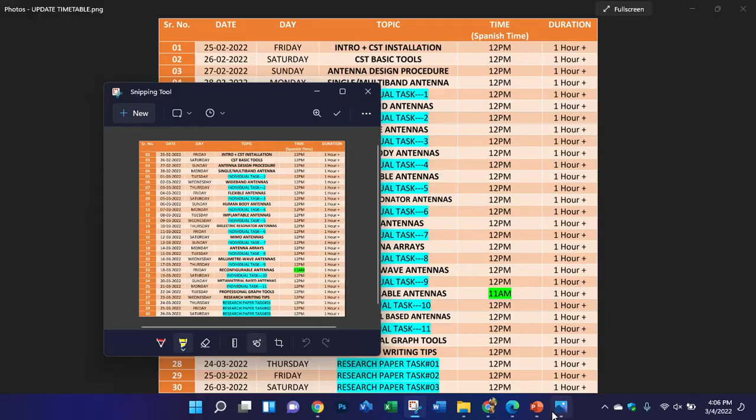Hello, sir. I saw your paper has been published. Congratulations. Yes, thank you. Congratulations, sir. This is not the only one. There are 3 other journal papers accepted, and I hope they will be published very soon.

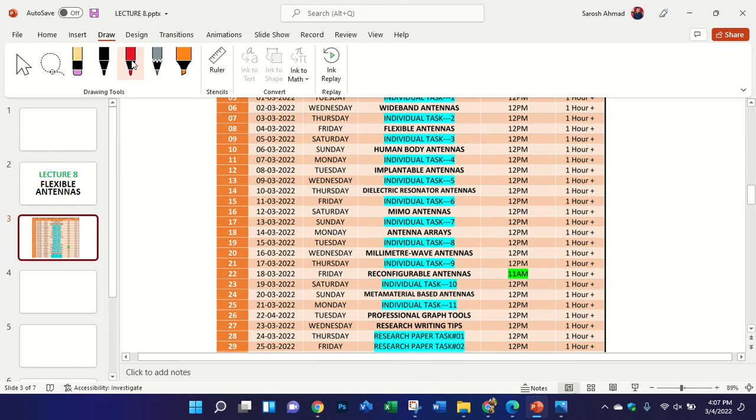Okay, let's come to the main point. I have realized that very few people did the task I gave you, and that's why I want to change my schedule, so that we will have more time for writing. So for this slide I want to change my schedule like this. Wait a minute. So this was the schedule, and we have finished our first, second, third, fourth, fifth, sixth, seventh lectures. We have completed our 7 days.

What we have next: today we will discuss flexible antennas. And for the others I want to change the schedule like this. I want to remove this one, the individual task. All individual tasks will be at the end of the lectures. I want to first target only antennas. Yes, that's a great idea. Yes, I will update the schedule and I will send it to you in the group.

I am thinking that because I have given the task and very few people did it, what if I continuously give the lectures, like on the next day I will give a lecture on human body antennas, then implantable, then dielectric, and once we complete all the types of antennas, you will have enough knowledge to decide which design you want to work on. Once you have decided, we will make groups, like 2 people who want to work on the same topic, and all of you have to publish one conference paper and one journal paper.

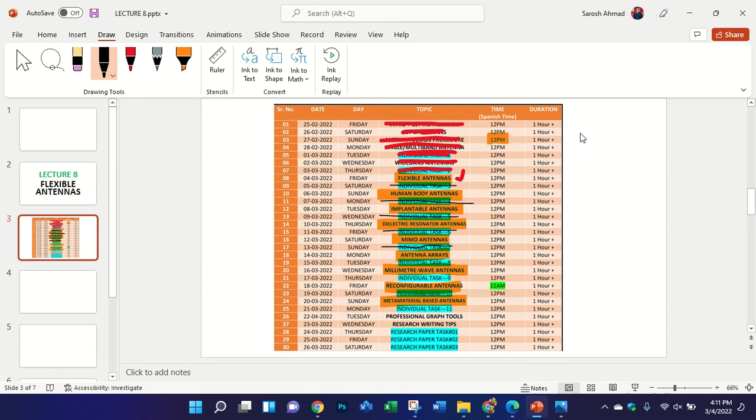Okay, thank you. Excuse me, Ahmad. The current one, 12 p.m., I think will be okay, because we have a lot of appointments on Saturday and Sunday, and we scheduled for 1 month. If we change it again, it will be a little bit difficult, because we also told our supervisor that I have a course to complete for the whole month, so he gives us the slots. Okay, only Friday at 4 p.m. is okay for all of you. 4 p.m. Yes. And for the other days the same timing, 12 p.m.

Okay. So what we have decided, I will continuously give the lectures. Sorry, Mr. Ahmad, can you please focus on the research paper? Yes, that's why I am telling you that I continuously complete the designs so that we will have enough knowledge and we can mix the fields, I mean mix the types of the antenna. For example, if we have 12 to 15 days for writing a research paper, for the first 2 to 3 days we will decide the design, or we will prepare the design to get some novel aspects. Then in the next 10 days we can continuously work on writing the research paper.

Yes, because we need more knowledge and tips about research papers. Yes, that's why I've decided, because I individually checked that very few people are working, so once I complete these important topics, then we will focus on research writing, and I will surely guide you and help you in that regard. Yes, thanks a lot. It will be like a collaboration with each other, something like that.

You all will work under my supervision in that case. Suppose two people like to work on implantable antennas, then I will create a group with you and the other person, and with me. And suppose some people like to work on dielectric resonator antennas; only two people are allowed to work on the same topic. So you have to decide the topic once we have completed these topics, and then we will decide the research topics, which design you want to work on, and how you want to start.

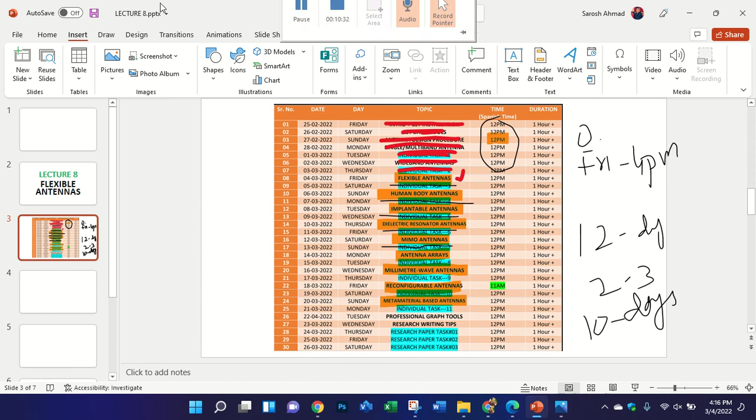Okay, so let's start with flexible antennas, and I remove this one. Today's lecture is about flexible antennas, in which we will study how we can analyze the flexibility of the antenna. Flexible antennas can be interlinked with other types of antennas, like human body antennas; they are mostly used in human body antennas, like implantable flexible antennas. So we can mix flexible antennas with human body antennas, and we can also mix flexible antennas with implantable antennas.

Because in flexible antennas we also have many different types, like wearable antennas and textile antennas, because cloth is a flexible material, and when we wear cloth, and when we sit down, stand up, and bend our hand, our cloth bends a lot.

So that's why flexible antennas have a major and very important role. We can mix this flexible antenna with many other types of antenna, and in this way we will have good designs. First we will study a review on flexible antennas, which types of flexible antennas are available in the research, and I will show you one of my designs.

Also we can focus on circularly polarized implantable or circularly polarized flexible antennas. This is the flexible circularly polarized antenna. Circular polarization is very important in terms of the novel aspect. If we achieve circular polarization in flexible or in all types of antenna, like wideband or on human body dielectric, in each case it is one of the novelties. So it is a very important thing.

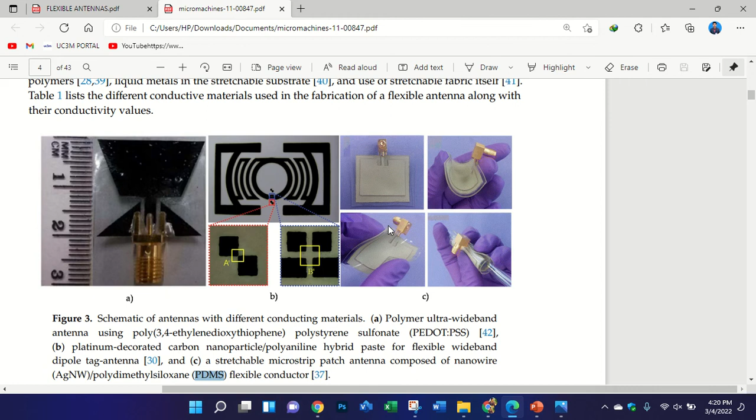You can see here this is actually an invisible substrate, and the name of this substrate is polystyrene. But I think this material is not available in my lab, or we can order it, but I suggest you use a polymer substrate or PDMS substrate. I think in CST, if you write PDMS, you will find the material. This is a flexible material that can be bent along the x-axis or y-axis. We will also study how to bend the antenna and do the bending analysis. So there are many types of material.

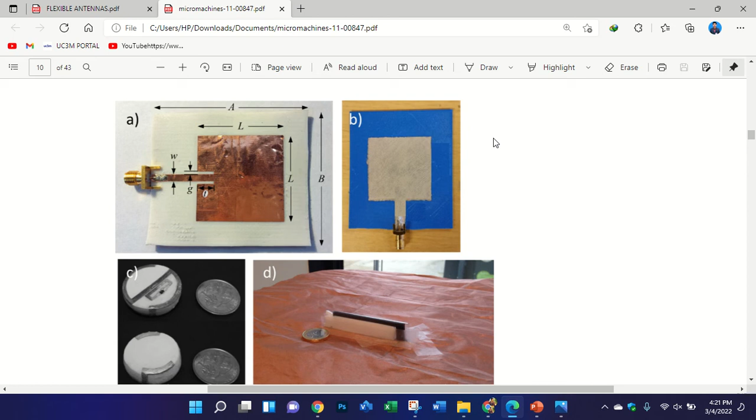You can see this is an invisible substrate, like a transparent paper or transparent sheet. Also some flexible antennas are made of textile material or cloth. I will show you here. You can see this is made of cloth. It can be cotton material or jeans material. I made one design on a jeans material, so you can use jeans material. Whenever you decide on a material, you need to know its properties, like relative permittivity, loss tangent and available thickness.

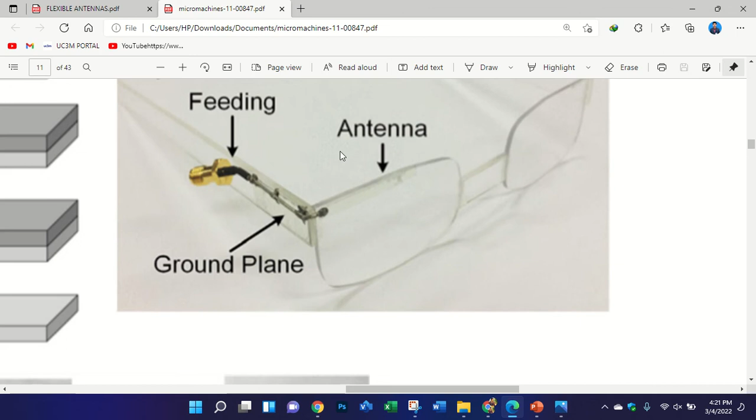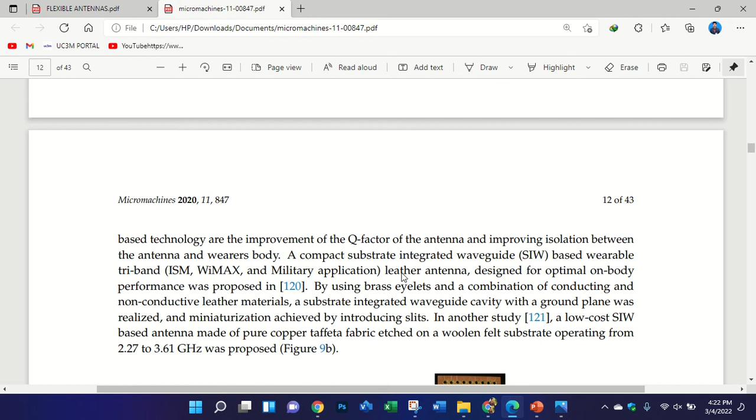Also in some glasses we use antennas; these are transparent antennas, very small antennas, embedded with some sensors. There are a lot of applications of flexible antennas, but we will not go to very complex ones. We will focus only on applications that are easily fabricatable here, so we will not have any problem. You can see this is, I think, a jeans material. Let's check the material here. I think they did not mention the substrate material.

Yes, you can see here this is another cloth material, textile. For textile antennas, one of my friends, from Algeria or Egypt I think, has a fabrication facility for textile materials. So I can ask him to provide us the data sheets he has in his lab for materials like jeans, and we can also work on invisible antennas, and they are flexible materials.

And some people like to make flexible antennas with metamaterial, okay. One of my papers is on metamaterial-based flexible antennas. And in Rogers, if you are using a very low thickness substrate, like less than 1 millimeter thickness, like 0.76 millimeter or 0.25 millimeter substrate material, then it is flexible in real time. But in a prototype, if you are using 1.6 mm or 3.2 mm, they are not flexible. In simulation yes, but experimentally they are not flexible.

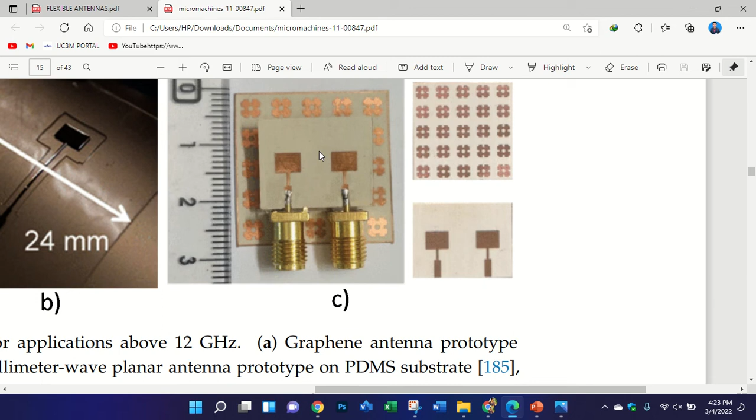I will provide you the data sheet of the flexible materials that we have in our lab, and then you can work on it. But first I suggest you use Rogers material that has very low thickness, okay.

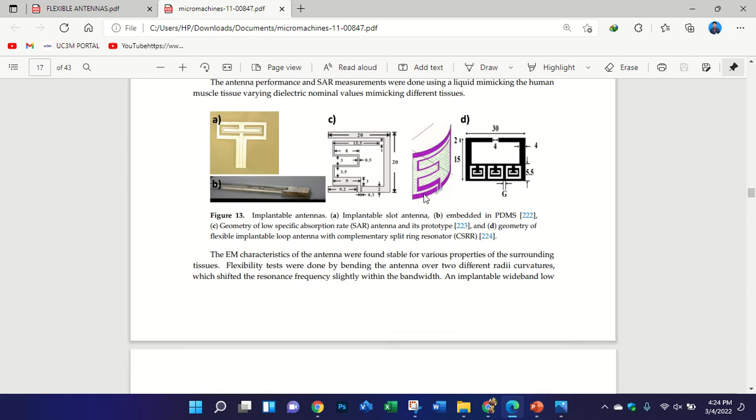And some people use flexible antennas in implantable antennas, like you are using a flexible material of polyimide, and you can bend the flexible antenna on a capsule. In this way it will become a capsule endoscopy implantable flexible antenna. Like you can see here, this is a flex antenna made of flexible material. They did not mention the name of the material, but I think it can be Rogers Ultralam or a polyimide substrate. And they have bent the antenna on a capsule.

And then they have inserted the antenna in a phantom. It can be a skin-mimicking gel, or it can be another material that has the property of muscle. Okay.

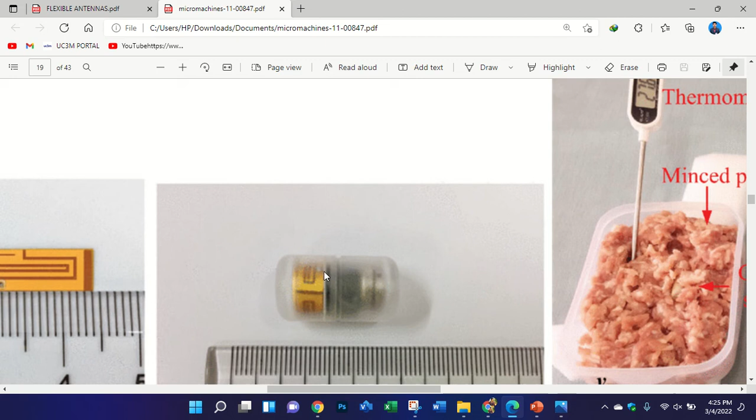And also you can see here, I forgot the name, they have a battery. In a capsule, they have inserted an antenna. They have rolled the antenna and connected this antenna with the battery, and this is a capsule. And then they have embedded it inside minced pork that has the same properties as muscle tissue, with a relative permittivity near 58, or 54.

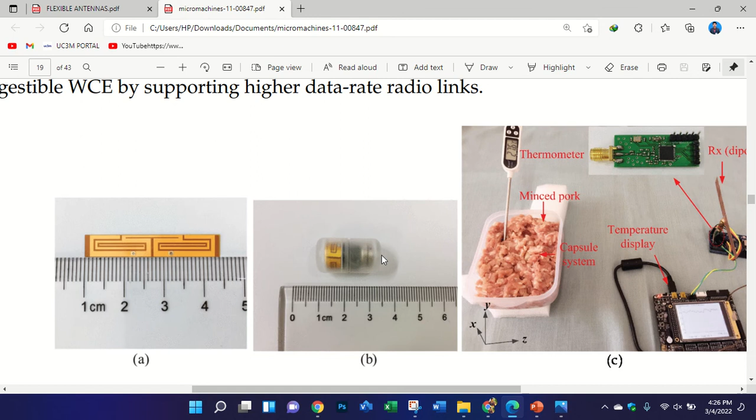Excuse me, Mr. Sarosh, it's endocapsule, I think. Yes, endocapsule, this is an endoscopy. Yes, endoscopic or capsule antenna. In implantable they are very much the same. You just need to bend your antenna on a capsule, and then you can test in minced pork or skin-mimicking gel.

Why is it important to have flexible antennas? What are the characteristics of these flexible antennas? Suppose you have designed an antenna. Suppose you have S11 on the y-axis and frequency on the x-axis. Then suppose you have designed it to operate at 2.45 gigahertz, and your design is operating at 2.45 gigahertz.

At minus 10 dB. In a flexible antenna you need to achieve some more bandwidth, because if you bend the antenna, suppose along the x-axis, your S11 may shift. So if you have a wide bandwidth, and you have bent the antenna along the x-axis, it will behave like this, and it should still cover the ISM band, like 2.45. When you bend the antenna, there is a little shift in the frequency.

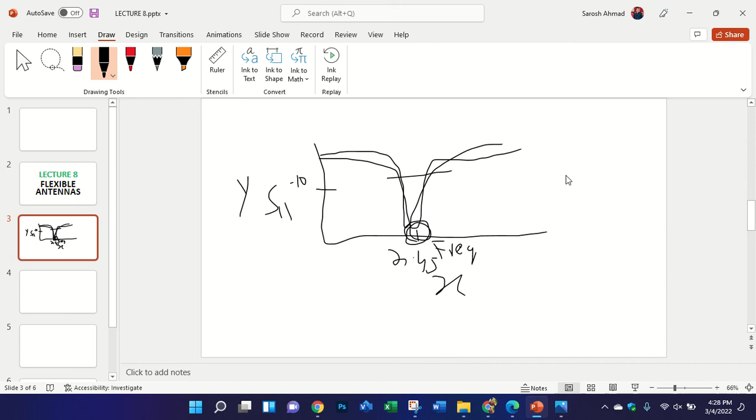If there is no change in the frequency band, then you can say your antenna is a flexible antenna. And if after bending your antenna you are not able to achieve the same frequency band, then you cannot claim that your antenna is a flexible antenna. So you check the antenna along both axes, the x-axis and the y-axis, to check whether the antenna is bendable or not.

Like this one, this is another journal paper of mine. This is a Q1 journal of Tech Science Press, with an impact factor of 3.772. We will discuss the flexible circularly polarized antenna; we are not discussing the implantable antenna. This paper is 70% on flexible antennas, so we will discuss this antenna in detail.

You can see here this is a very simple antenna made of a Rogers 5880 substrate that has a thickness of 0.25 millimeter. I also suggest you use this material to make your antenna flexible, because Rogers 5880 is a compatible substrate, and it is also a bendable substrate. It will not disturb your frequency if you bend your antenna along the x-axis or y-axis.

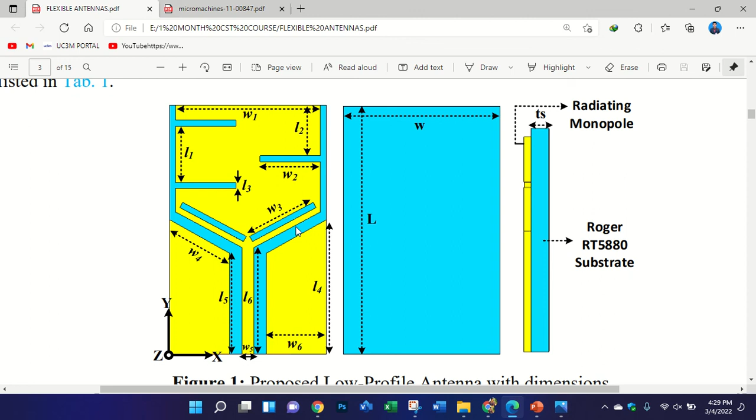So you can see this is a radiator that has some slots inside, and this is a feed line, and this is a modified ground plane. This is a CPW ground plane. You can see I have modified some shape, and also this one, to achieve the circular polarization.

The size of the antenna is very small. In implantable antennas, now people are working on implantable antennas. The implantable antenna has a size of 7 x 7 millimeter square at the frequency of 900 megahertz. And also I have some published papers on implantable antennas that have a size of 5 x 5 millimeter square at the frequency of 900 megahertz.

So this design has a length of 21 millimeter and a width of 13 millimeter, and it is operating at 2.45 gigahertz. So these are the design steps of this antenna. First I designed a simple patch antenna, then modified the patch radiator, then modified the CPW, and then created a slot to achieve the wide bandwidth.

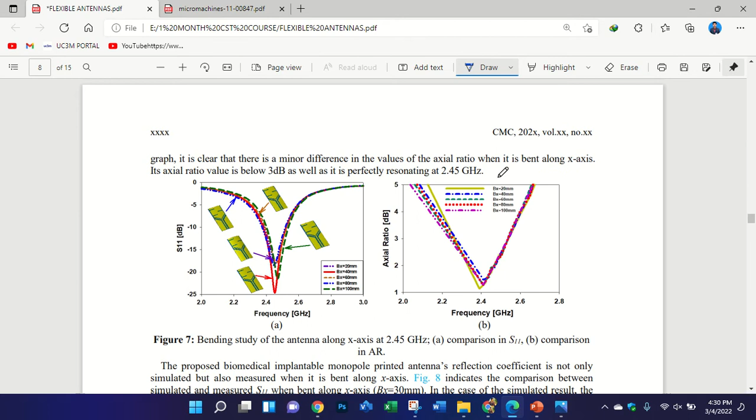So let's discuss its flexibility. In the simulation you can see, first I bend the antenna along the x-axis, and even if I bend the antenna at 20 millimeter radius, and I simulated it from 20 millimeter to 100 millimeter radius, you can see the band still remains the same at 2.45 gigahertz. So it is a flexible antenna.

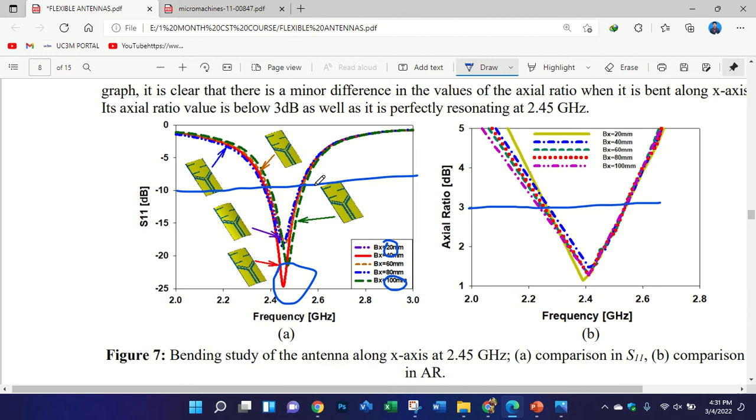You can see along the x-axis it has the same results as when it is not bent, and also you can see the change in the axial ratio. There is not much difference in the axial ratio. This is along the x-axis, and then I have tested this antenna in the lab. You can use a foam material.

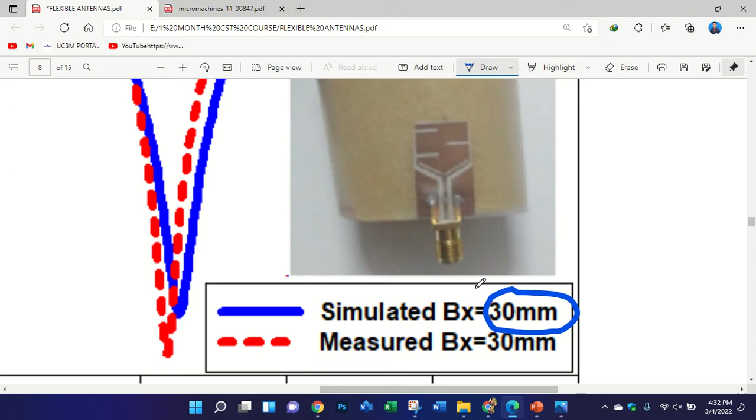There is a white foam, you may know, that has properties like free space, and you bend your antenna along the x-axis. You can bend this antenna on a foam and then attach it with a sticker or tape, and then you can see here it is bent along the x-axis, and the radius of this foam is 30 millimeter. That's why I was able to test the antenna only at 30 millimeter.

Then I simulated the antenna along the y-axis. You can see here, first I simulated at 20 millimeter and then up to 100 millimeter, and you can see the S11 still remains the same, just with some little reduction in the return loss, but it is still below minus 10 dB at the operating band of 2.45 gigahertz, and there is no big change in the axial ratio.

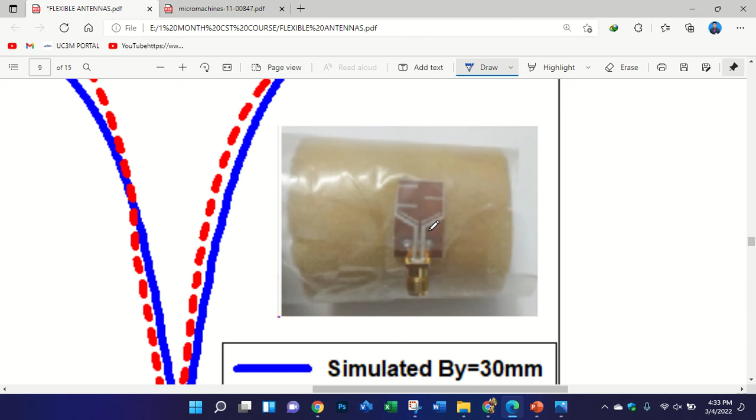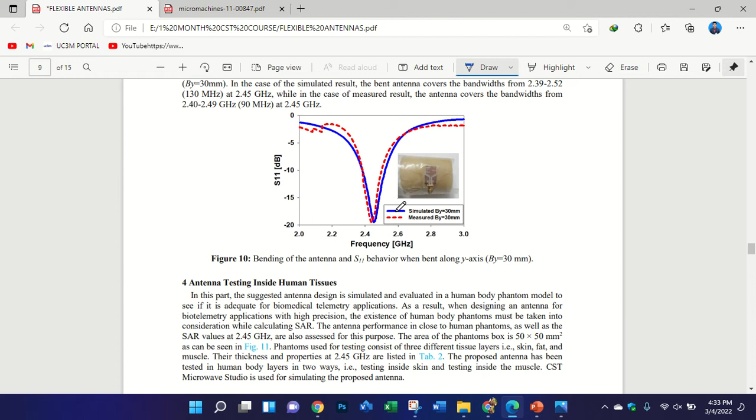And also I tested along the y-axis. You can create a circular foam, and then you can test your antenna along the x-axis or y-axis. This is the same foam, but I just changed the direction of the antenna to check bending analysis along the y-axis. And then we will study implantable antennas and discuss these things. In CST we simulate this antenna and check bending analysis.

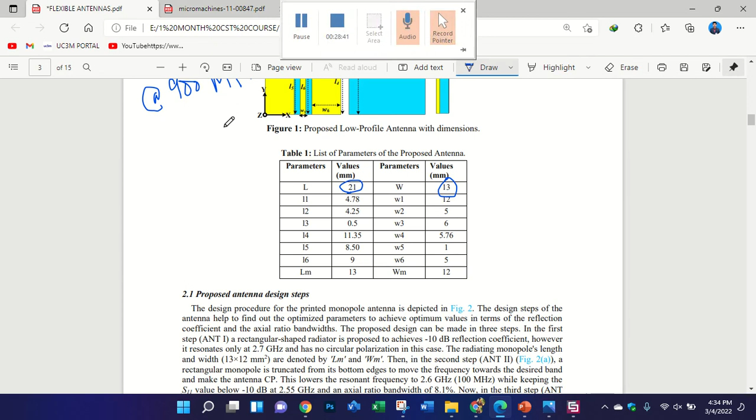Could you send us the review paper for the material and for this flexible antenna? And also your paper, if it is possible. I cannot send you this paper because it is accepted, and I hope in a few days it will be published. When it is published, then I will send you. At least the review paper. Yes, I will send you this review paper, and also the data sheet of the flexible material that we have in our lab, that you can use.

Thank you. The other thing, if you want to work on flexible antennas, then you must combine them with a complete application like implantable flexible antennas or human body flexible antennas, because flexible antennas are mostly used in these cases. And I think also you can use it as a MIMO antenna for the glass or the mirror of the car. Yes, but I did not see many papers on flexible MIMO antennas, because in MIMO antennas most people like to work on the novelty of reducing the transmission, to achieve better isolation, ECC, and to enhance the diversity performance.

Yes, but we do not use flex much in MIMO antennas. Okay, we can even use it in an antenna array. In the case of MIMO antenna, brother Ahmed, about the phantom itself in CST, I think for free CST we cannot find this phantom. Don't worry, I will provide you everything. Even if you don't have it in CST, I will provide you extra, then you can simulate in your own CST. Okay. Thank you, thank you.

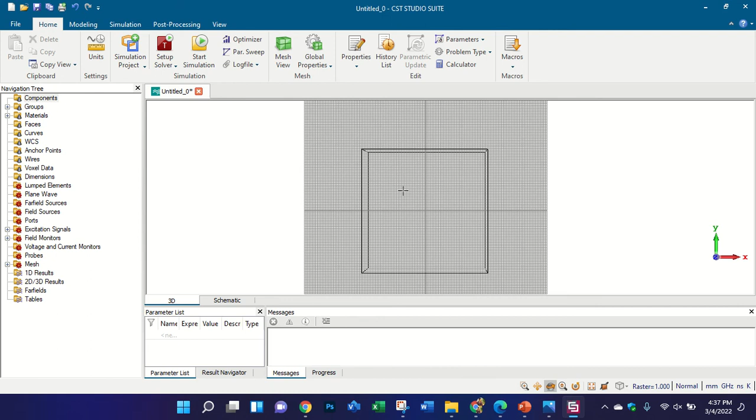There is a question. Yes, I will send you the supporting documents through email. What will be the maximum frequency range to work with a flexible antenna? Which is a good substrate material that is easily available? I told you, Rogers 5880 is easily available everywhere, a flexible material of thickness 0.25 millimeter or 0.508 millimeter. Don't use FR4 of 1.6 millimeter thickness, it is not flexible. With 0.8 millimeter FR4 it is somewhat flexible but not fully flexible.

The main target is to complete a design and then to target a research journal. We will complete these topics day by day. I hope in 10 days we will cover our topics, and then I will give you a brief introduction to professional graph tools so that you are able to make good resolution graphs, because in journals papers are mostly rejected because of low quality graphs. I will provide you the links from where you can download these softwares.

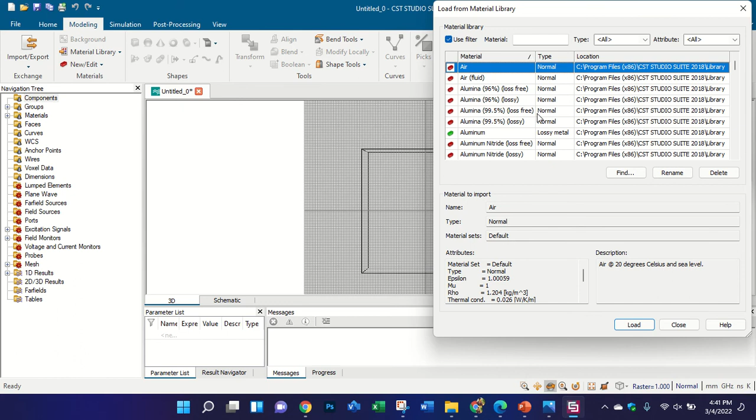Excuse me, Brother Sarush, you mean I can make the free space around the antenna water? Yes, I mean in this radiation boundary, in this box. Let me create a substrate here so that I can discuss.

So you mean that you change the background? Wait a minute, wait. The radiation box. Yes, this one. Okay, suppose you have your antenna like this, and you need to create a box, or there are different ways. Because your antenna will be in water, you can even change your free space into water.

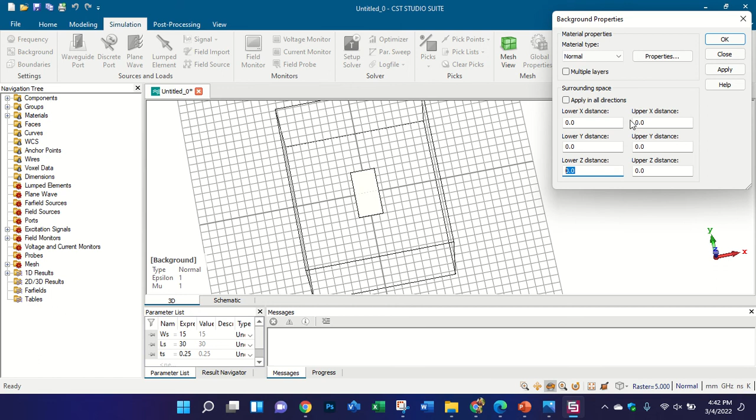And the water property is available here, yeah? If you want, I think you can apply dimensions here. Yeah. Does the dimension have a specific size, or can I make any dimension? Because I think at least it should be lambda over 2. No. Actually, you need to check the research paper.

It depends on the size of your design. Or there are some websites where you can write the properties and size of your antenna, and they will suggest the size of your water cylinder or water box and many other things. Okay. Because actually I have data about the oil, and now I'm working on the sensor. But my problem is I don't know how I can create the oil around the antenna sensor.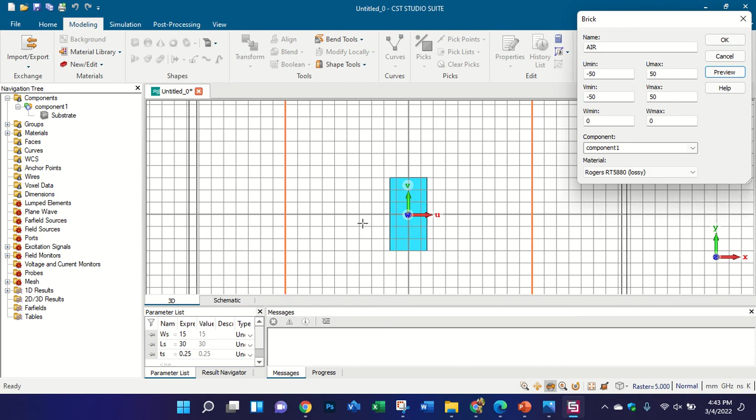You can create a box. You can create a brick. You can write here like air, and you can create a boundary here of 100 millimeter length. It depends on the size of your antenna. If your antenna is very small, you can set it according to it, because the properties are the same even if you increase or decrease the size, but keep it more than 50, not less.

Because if you have water in large quantity, the properties will remain the same, it will not change. So in this way it will not affect much. So in this way you can load the material like air or water, like this one, and use it as a reference. Yes, okay. Thank you. Okay, so next, what is the dimension?

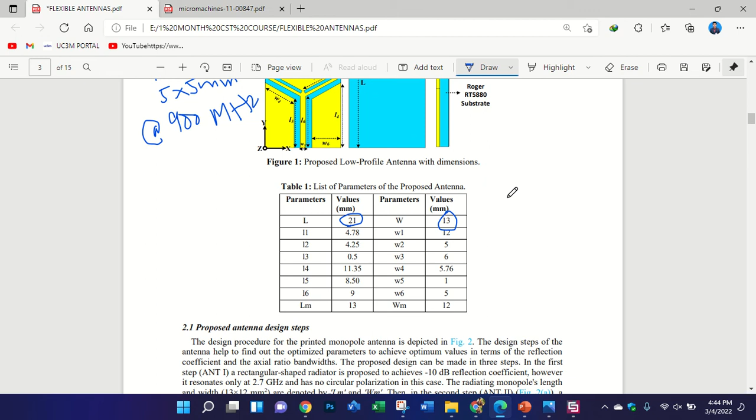This is 15 cross, and you see the size of the antenna is very small. This is 21 cross 13 millimeter. Even if you are designing the antenna for implantable use, this size is still very large, because for implantable antennas researchers are working to reduce the size. Many research works have been done on 7 cross 7, but now they are working on 5 cross 5 millimeter square. I have even published a paper on this 5 cross 5 millimeter square.

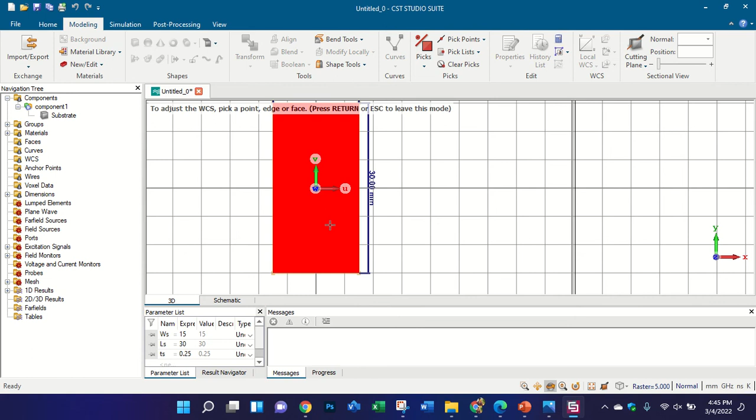For the flexible antenna, you see the thickness of the substrate. It is very thin; you can even say this is a low-profile antenna. There are so many ways to design the flexible antenna. Designing is the most important thing. If you know designing, you can implement the design in each type of antenna and make any shape. As I told you, in antennas you are open to work, but it depends on your results. If you have achieved better results, then surely you can defend your paper.

And also you can use this curve like an outline. Suppose I have an idea in my mind and I can start designing with this tool, thinking I should try this shape. What will happen if I make this shape like this one? You are not restricted to make the CPW as I told you. You can modify the shape of the CPW, or use CPW in many different ways, like I am going to use here. And it is not necessary that you make the strip line at the center of this design.

I have some designs I will show you, but the paper is not published yet. Yes. So one can shift the feed line. Yes, in one of my designs, in the Scientific Reports journal, I designed the antenna. Okay.

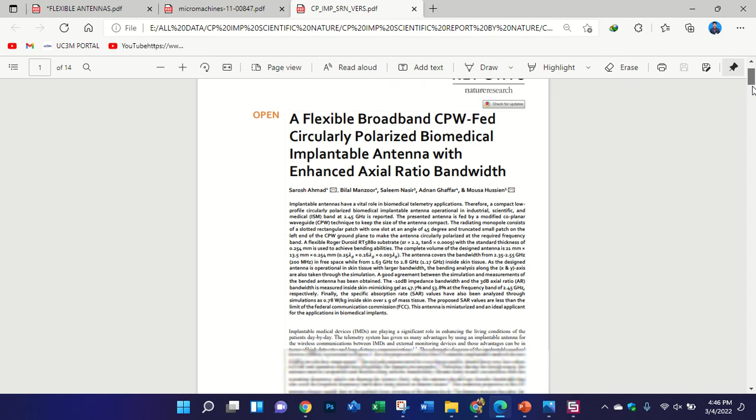Do you know Scientific Reports by Nature? This is a Q1 journal, and it has an impact factor of 4.22. Okay. Yes, yes. Yes, I have maybe four or five publications in it. Yes, it is a very good journal and a very famous journal. Yeah. And it is very, very expensive.

Yes, and you can see here I even modified the shape of the design, and I also did not use the feed line at the center of the substrate. Okay, because if you use the feed line at some distance from the center, then it helps you to get circular polarization. Okay, you can see if the current flows in this upward direction, then your current is struck with this strip line, with this slot and this slot and this slot and this slot. Okay, and it will give you some circular pattern.

Okay, also like this one. Okay, with this you can see here. Okay, and this is a very good design. Okay, and inshallah it will be published very soon. Okay. I have a lot of designs. Some are published and some are not yet. That's why I'm not showing you all of my designs, but I'm giving you some ideas on which you can work. Okay.

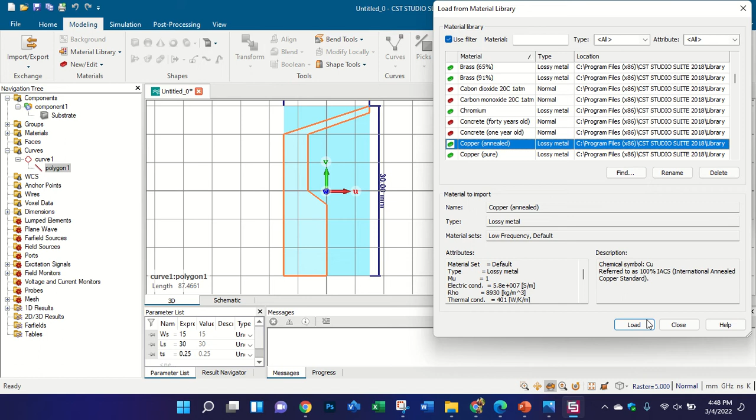You can see I am just creating an outline of whatever I have in my mind, and I will check how the results will be. For the patch you need to use copper. Okay, this is ground. I am using this as a ground. Okay, like for the CPW, just with a modified shape. Okay, and I am going to create a shape for the radiator.

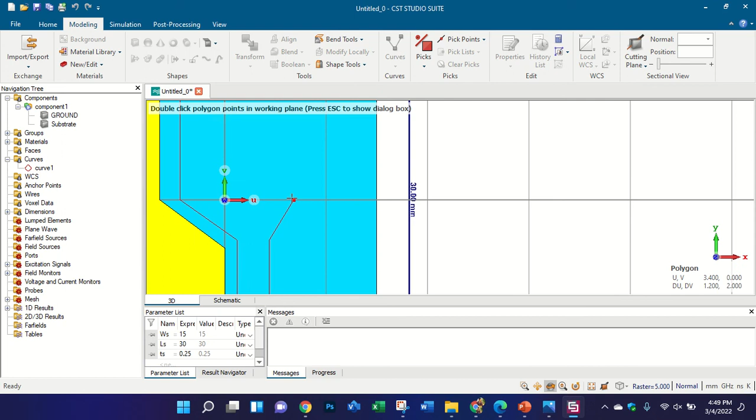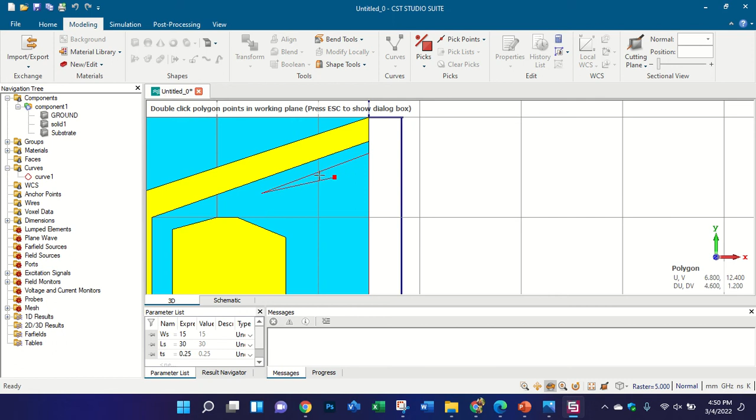After that you can again modify the shape by creating slots and many other things. Okay, and in this way it is easy to achieve. If you modify or make any shape, then you can easily get circular polarization. Okay, if you can see, some of the slots are at an angle of 45 degrees, so in this way you can easily achieve circular polarization.

Later on you can even cut this shape. Okay, you can change your shape. Okay, I am just designing whatever I have in mind.

But in order to make a proper design, you can make a figure in your copy or on a paper, and then decide which type of shape to design. Okay, and then you need to work on it. You need to work a lot, you need to optimize the slot, you need to optimize the feed line, the length of the feed line, the width of the feed line, and then the width and length of the patch, and many things. Okay, so in one day you cannot easily design a simple antenna. To achieve good results you need to work a lot.

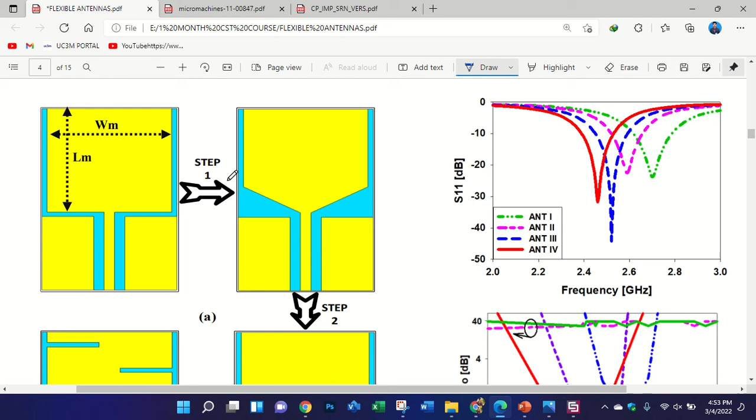Brother Sabuji, actually, I want to ask you something. When selecting the size of the substrate, did you select it according to the equations in the EM book? Or we just say, okay, I need to make an antenna, for example, 1 centimeter by 1 centimeter, because we also have a limitation. At first I told you in the previous lecture, you only use equations for the simple patch antenna. Okay, but for the designed antenna you do not use equations. Okay, yes, sure. You just check these equations and calculate the size of the substrate.

But as I told you, if you study the research, you can see in this table, all are the same frequency. Okay, but why is the size different? Why is their size different from this one? Okay, so it means they are not following any equations. People are just doing work to reduce the size more and more.

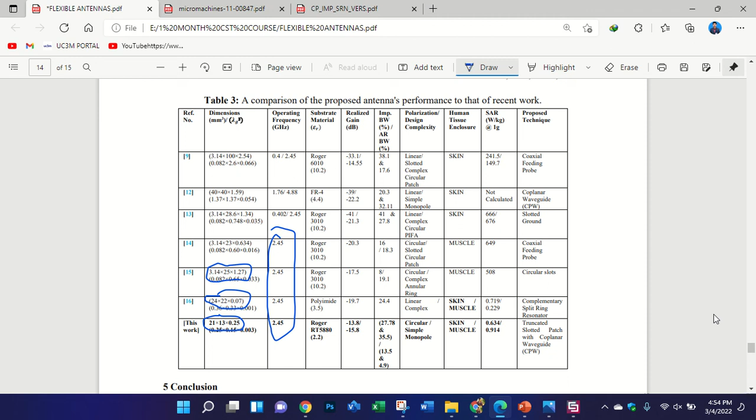Ahmed, so it means we don't have to follow the equation for the final design? Even if you study research papers, you will find equations in them. Okay, but they do not follow the equations, they just add them to show that they are following the equations, but in fact they did not follow any equations. Like for an irregular shape, like the turnstile antenna, something like a dipole where we put some upper element on the top and the lower side, we don't have to follow any equation for that one. You can follow. I'm not saying you need not follow any equation. Some people like to go with the equations to make a proper design, okay.

But these types of equations are mostly usable or suggestible in simple patch antennas or simple circular patch antennas like this, okay. But if you are creating different shapes with the equation, you can just know the size of the substrate, not of the radiator. You can know the size of the substrate, but in the patch or radiator, and in the ground plane, you are open to make any type of shape, because the shape will not disturb the size of the substrate.

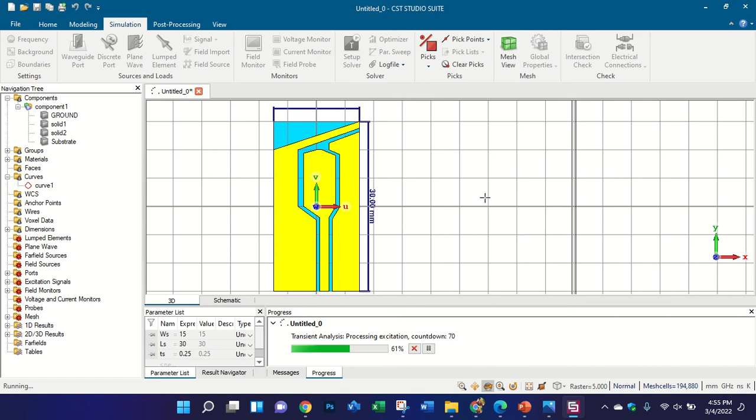And one more thing, in CST, if we want to optimize the parameters, we can define it by the particle swarm optimization algorithm or something like a differential evolution algorithm. So is it necessary to parameterize all the parameters of the antenna? Yes, it helps you a lot to achieve better results. Like why I keep this size of the patch.

If you go to the simulation, you will find the parametric sweep option. Then you can run the simulation 4 times with different lengths of this patch, of the radiator. Then you will know if I increase the size of the radiator, what will happen with the frequency of my antenna. In this way it is easy for you to optimize the design and achieve better results. And you will know why I'm using this load, and what will happen with these loads on the operational frequency.

Because nowadays designs are made with artificial intelligence; we parameterize the antenna and use an algorithm, and we optimize by AI algorithm. Yes, if you are designing the antenna with Python or with artificial intelligence, then I cannot say anything, because this is a very new field that is shifting towards antennas.

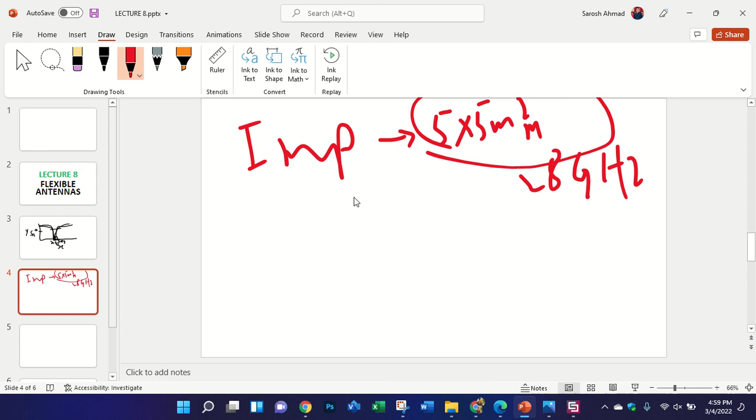We cannot say it will reduce. Let me explain one more thing. Then you will say your concept is wrong. If you are working on implantable antennas that have a size of 5 by 5 millimeter scale, the frequency should be more than 28 gigahertz. But they are using a 5 by 5 millimeter scale to operate at 900 megahertz. So where is the question now?

Actually, I wonder, maybe the material plays a role in this. No, the same material. If you use Rogers 5880 for this and 5880 for this, the same size. So this means working on the slots or something. Yeah, of course, the slots or modifications will play a role. But I mean the size of the substrate itself. Yes, actually, your antenna size just depends on the substrate size.

Not on the radiator. But as I told in the previous lectures, some people like to calculate the electrical wavelength or guided wavelength of the antenna. It tells about the size of the radiator. In this case, we know the trick now. Yes, it is a trick. Yes, thank you.

Wait a minute. There is a question in the chat box. Recently, terahertz antenna design is considered a hot topic. Can you please manage a lecture on it?

Yes, I will try to give one lecture, or maybe in some lectures I will discuss the terahertz topic. Okay, terahertz is not a very difficult one, just the change in the frequency. Some people are shifting towards the higher frequency bands, and there are a lot of limitations at terahertz. You cannot use FR4 for the substrate because the thickness is 1.6 millimeter. Even the size of the antenna at terahertz starts from 1.1 or 1 millimeter.

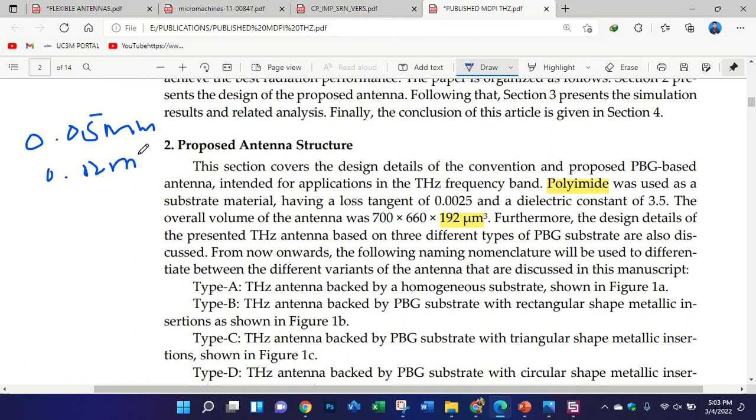So you can even use this because polyimide, as I told you, is available in many thicknesses. It is also available in 0.05 millimeter, and also, I think, 0.12 millimeter. But this paper is based on simulation only, not fabricated. Yes, I read it. I was astonished actually because we cannot fabricate it. Yes, this is not fabricated.

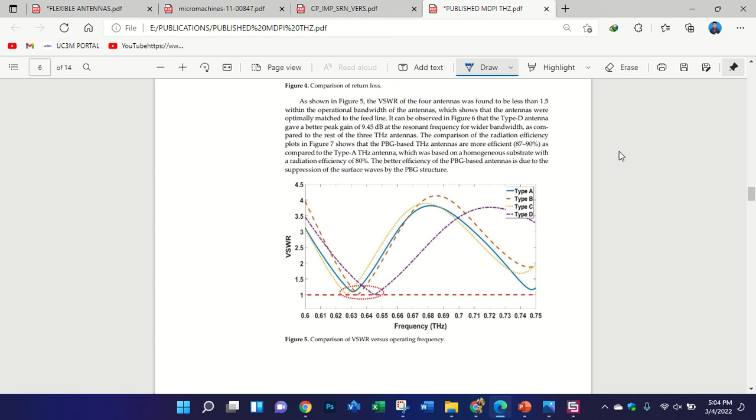I have one other paper on terahertz, but it was rejected from MDPI. They asked me why you did not add the measurement results. But in this paper, three types of antennas are discussed: this is a square shape, this is triangular, and this is circular. The main thing is the size is very small, so this is the main difficulty. I think you put the circle at 20 microns.

Yes, that's why I told you at the terahertz band there are a lot of limitations. So you need to discuss and get knowledge in detail, and then you can be able to work on terahertz in case you want to go towards experimental results.

Another question: when creating shapes, is it advisable to start straight away or start with the basic antenna shape first, like rectangular or circle? Yes, I suggest you first make a simple patch antenna, like a microstrip patch, because in each of my papers you can see I start with a simple patch antenna like this one, and then I try to modify the shape. In each paper you can see these types of design steps.

In each of my designs I tried with a very simple one. If I want to work on a circular patch, then I will start with the circular one and try to modify the shape. I also suggest you start with the simple patch, then make a very small modification to the shape, and then simulate again and check what the effect is on the S11.

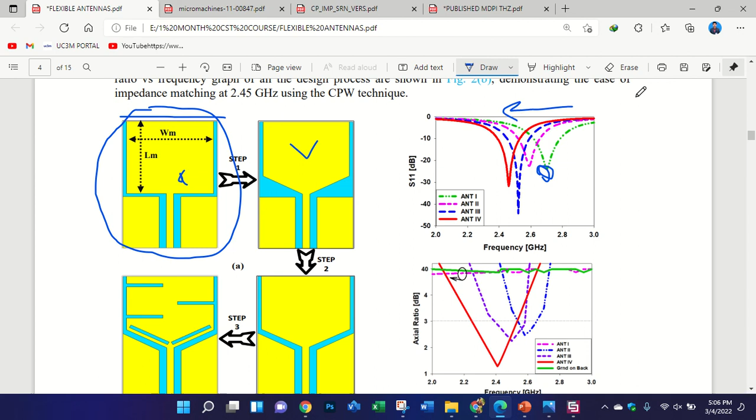Okay, dear Ambrish, you can send me the picture of your warnings. Okay, because a warning does not affect your results, they are just a warning, or maybe because of your system compatibility. Okay,

okay, so for this antenna I'd like to discuss the flexibility, how to check flexibility. You can design it at any frequency. Okay, I am just sharing here a flexible antenna. So this is your flexible material. And in simulation, flexibility of any material is available.

Because even if you are using FR4 in simulation you can bend the antenna, but you must know which type or which material is experimentally bendable. And then you need to use that material; like this Rogers material is experimentally bendable, so you can use this material in simulation. Okay,

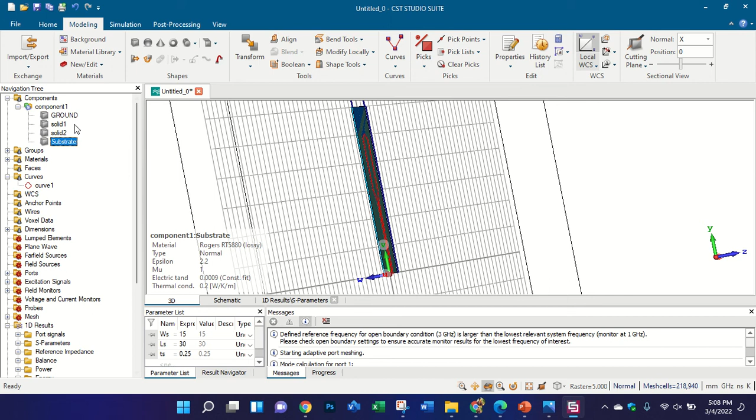okay, so first I do not suggest you align your WCS on the front side of this substrate. I suggest you turn your antenna and use align WCS on the other side of this substrate. Then select all the components, go to the bend tools and click on cylinder bend. And you need to select one sided.

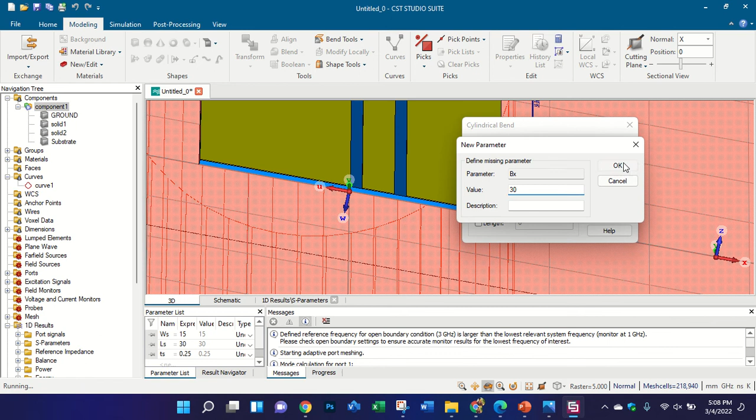Okay, click on the preview to check, and you can see here your antenna is now bending. You can write here bx, bending along x-axis. Click on the preview and write here 30 millimeter, or 20 millimeter. In the paper I have used the same thing. Click OK, and in this way you can run the simulation.

You don't even need to do multiple simulations, like design the antenna, check your results and then simulate again. You don't need to do that. If you know you are using Rogers 5880, you need to run the simulation only one time. First finalize your antenna, like at 2.45 gigahertz, and you know you have used the flexible material. Just run the simulation one time.

I suggest you use a parametric sweep, only one time. You just need to write here like 20 to 100, and use 4 or 5 samples. Yes, it will calculate at 20 millimeter, 40, 60, 80 and 100. You need to run the simulation like this, and it will check your results at different radii.

And then you will check whether your results are operating at 2.45 gigahertz. Even if there is a little shift in the frequency, no need to worry, but your band, I mean 2.45 gigahertz, must be below minus 10 dB. Okay.

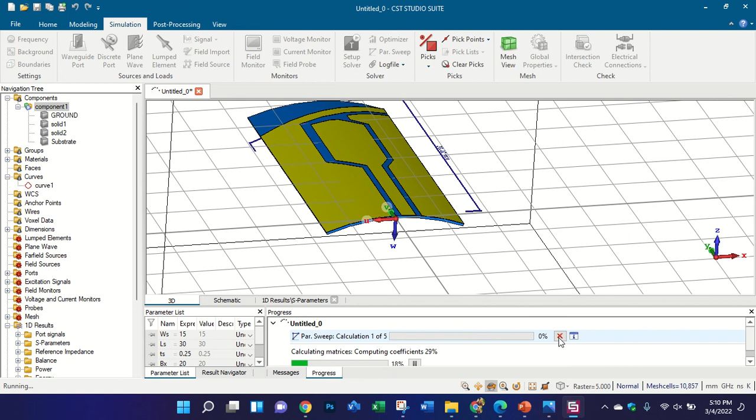But I think you need to stop the simulation or do it one by one to take the snap for the antenna itself. For sure, I will stop the simulation. I'm not going to wait for a long time. I am just showing you how you can do a parametric sweep and calculate the bending. This is nice, actually very nice.

And I will also show you how you bend your antenna on a smartwatch. First, this is the way of bending along the x-axis. In the same way, for the y-axis you just need to rotate your WCS at an angle of 90 degrees. Okay,

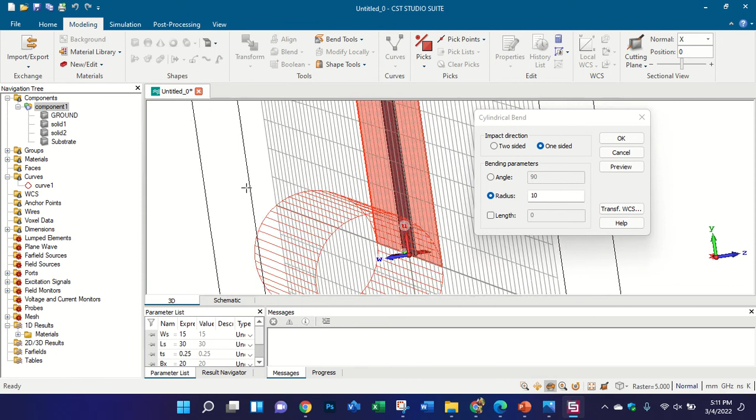and for the vertical axis you only need to bend along the y-axis and use one-sided. No need to use dual-sided, as I explained before. Because of the connector issue. Yes, if you bend from the other side, you will have a connector issue; it will not connect with the port. So in this way you can do the simulation.

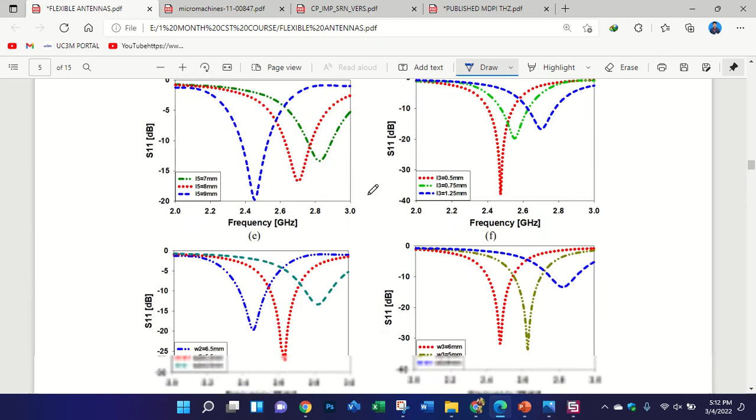In the next lecture I will show you how to make graphs, because, you see, in my paper I use these bending graphs, like this one. Actually, I think Origin is very nice to insert a picture in.

I usually do it. Yes, Origin is very good software. At first I was using SigmaPlot, but now all my software has expired because I did not use it for a long time. Actually, my partner uses it, but I don't prefer it.

Yes, so in this way you can do this simulation. I have designed a smartwatch, but I'm not going to show you, or maybe. In CST you can even design a complete smartwatch and then bend your antenna on it. I think I have a CST file of this smartwatch, and also of a hand. Let me look here. Yes, this is a human hand.

Because this is at millimeter wave band, that's why the size of the hand is very small. Okay, so this is the hand. You can import it from SolidWorks, like here. Yes, you can download this hand from the internet, or from the SolidWorks website, and you just need to import it. In this way you can import the complete hand and assign the properties of the human body.

Okay, so in simulation you can use this hand, or it is even very good to add in the paper. How much time will it take for this simulation? You mean how much time it will take for simulation? Yes. It depends on the capability of your computer or laptop.

If you have a hard disk of, I think, 1 terabyte, like me, and RAM of 32 GB, then it simulates in not more than 30 minutes, if you are only simulating. But if you are calculating the SAR values, then it may take more time, maybe 1 or 2 hours. But on a normal computer, like if you have a 500 gigabyte hard disk and 8 GB or 12 GB RAM, then maybe it will take 3 to 4 hours or half a day.

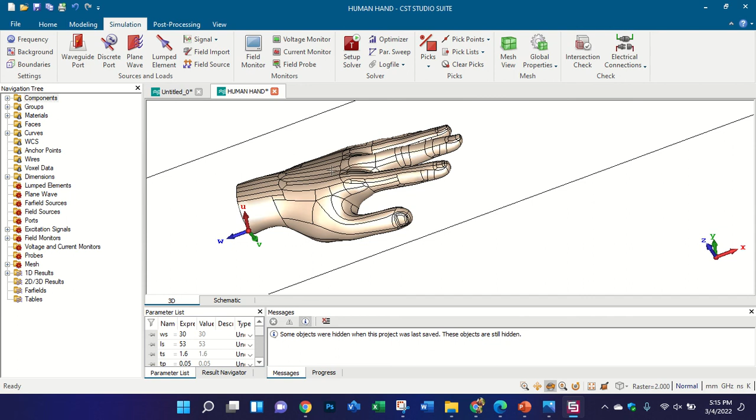Okay. And I want to ask you about the acceleration option in sweep. Can you explain it to me? Can you repeat your question? I want you to explain the acceleration in parameter sweep. Acceleration? Can you write it? I did not understand. Yes, like that, and make new parameters. Suppose you have this one. There was an acceleration option on the right side. This one, yes. Can you explain how to accelerate the simulation?

Where are you using this one? I think I did not use this one before. Maybe I will check it and let you know. Okay, yes, please. Maybe it will help reduce the simulation time. I never used this one because I use another computer, not this laptop. On this laptop it takes time, but the university computer is a supercomputer and it is very fast.

It will also depend on the mesh sizes, which are affected by the frequency. If I am doing simulation at a lower frequency band like 2.45 gigahertz, then it does not take much time. But if I am simulating this hand at millimeter wave band or at terahertz, then it may take more time, because you have to increase the mesh at the higher frequency bands.

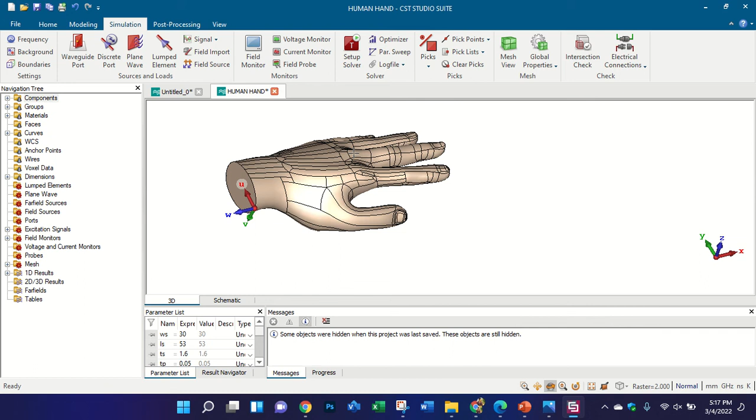Mr. Ahmed, for the computers in your university, what are their specifications? About the computers in your university. The CPU, I think, wait a minute. I wrote the specification here, somebody asked me about it before.

Mostly they give us like 16 GB RAM and a 1 terabyte hard disk, including SSD also. Mine has a 1 terabyte hard disk and the RAM is 32 GB. And the CPU? For the CPU I'm not sure, but I will show you, because I just set up my computer 2 days ago and I wrote the specification here. Wait a minute. So this is the specification of my computer, this one.

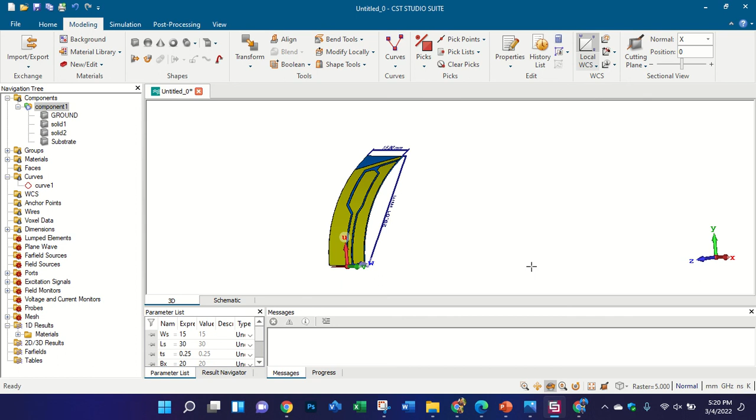I use a desktop. A desktop computer is actually better than a laptop. Yes, I have experienced this a lot. The very first time I used a laptop, and the laptop was discarded because of many simulations, and then I used the desktop, and it was very fast. But when I moved to Spain, I used the laptop, only for running simulations. Desktops are very successful. But I think there are laptops like workstations, as Mr. Ihab has. Yes, they have super laptops.

Okay, so do you have any other question? Tomorrow we are going to study human body antennas, and I will download some papers on terahertz so that you will have some knowledge on terahertz, and then we can study and decide. We will study human body antennas, a very interesting topic, and also implantable antennas, and I will explain all these types in brief detail. The simple antennas, flexible antennas, and wideband are nothing. The main topic starts tomorrow: human body antennas, implantable, and dielectric resonator MIMO.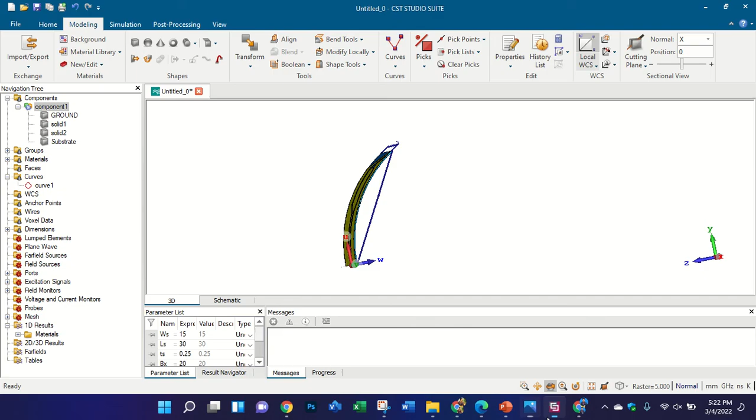Also, you can prepare for us for tomorrow, including the phantoms and the human parts, and how we can use them. Tomorrow you can ask me what you need. If you need a human body, I will explain everything tomorrow. This is my laptop, and I will show you how you can run the simulation on the human body even on your laptop, if you don't have a supercomputer. How we can assign the properties of the hand or any part? Yes, I will explain. Don't worry. Thank you very much. Any other question?

Yes, sir, I have one question. I'm a beginner in antenna designing in this domain, so I want to get some fundamental theoretical knowledge. I know Balanis' book is very famous. Can you recommend video lectures of good professors that I can follow? I know some professors; I will share the YouTube channel. They explain very well, and in this way you can have theoretical knowledge. Thank you, sir. Any other question, please?

Sir, are Balanis video lectures available on YouTube? I didn't find them. I suggest one, an Indian professor; the channel is Engineering Funda. You can visit that channel and you will find every lecture on RF, microwave, and antennas. Will you share it on the WhatsApp group? Yes, I will share through WhatsApp and also by email. Don't worry. Thank you.

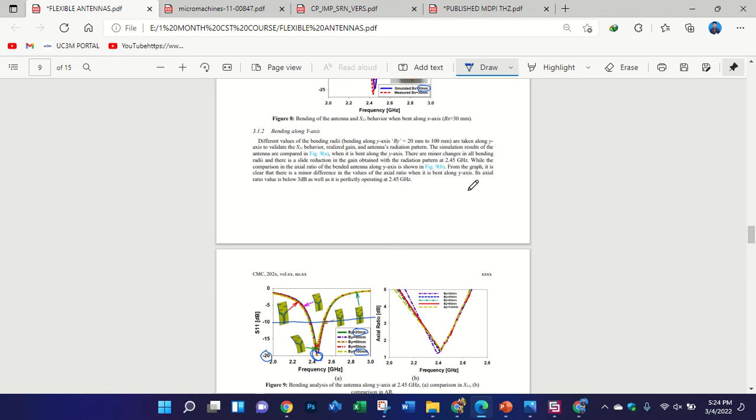I want to ask: is there a phantom for the human teeth or jaw? I think if you know the properties, the epsilon value, you can create your own phantom. Two or three years ago I read a paper about the effect of the mobile on the human jaw and teeth, in the Antennas and Propagation Magazine, I think. I don't see any other application or research, only this paper. When we import the human body model, you will find more than 30 or 50 or maybe more tissues of the human body.

Okay, so then you can select whatever you need. Please, thank you. Yes. Excuse me, Ahmed.

Yes, please. During the analysis of antenna, when we do analysis of surface current, we sometimes increase the A by M scale. So, is there any threshold for that so we can analyze the surface current? If there is any CST file, you can open it and I will tell you. I did not understand your last step. Is there any file about, like, what?

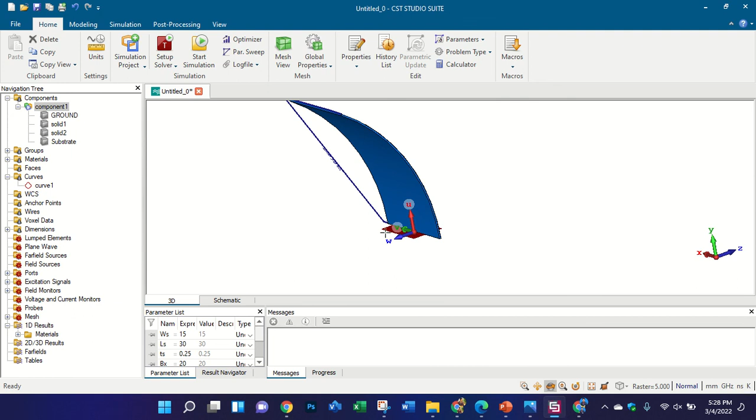Yes, actually, at first when you simulate or bend the antenna, it gives some errors, maybe because of the mesh size or because of the port. As I told you, when you bend the antenna, you don't need to use dual-sided bending. Because if you bend from this side, the port will not connect, and it will give you errors that your port is not connected with the design. So you need to make sure, because some people make mistakes.

So let me show you here. I have this antenna, and some people align the WCS at the center of the substrate. Maybe you have done it at the center of the substrate, but you need to align your WCS at the lower bottom corner of the substrate. Did you try it with the bottom side of the substrate?

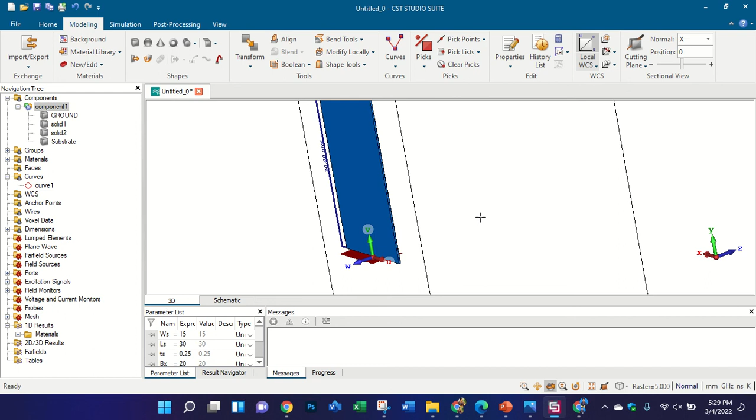No. But what I wanted to know was, in some cases when the antenna is being implemented, it's not only bending, but it may crumple, it folds into different kinds of shapes, not only bending in the Y or X axis. So the bending is not uniform. It bends in different kinds of shapes. So is it possible to also simulate those kinds of bending effects?

Yes. Suppose you want to bend your antenna according to muscle tissue, or you want to bend the antenna on a smart watch. Then you need to create a shape behind the antenna, and then use some other tools like bend layer stackup. Then it will fully bend your antenna on the surface of the watch or the muscle tissue.

Okay, all right. But in most cases your antenna is not fully connected with the tissue, because your antenna is flexible and it has some distance, like 2 millimeters or sometimes 5 millimeters, from the tissues, or some other things. Yeah, that's true.

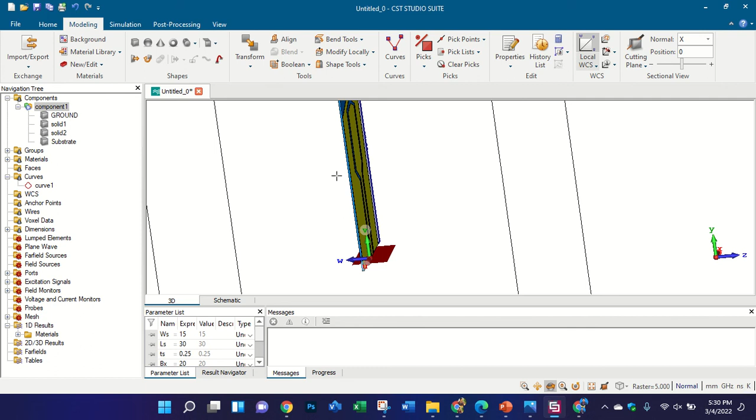Okay, any other question, so that we can end the meeting? From tomorrow we will start on the other types of antenna, and we will try to complete the types of antenna as soon as possible, so that we can start on the writing, because writing is also a very important thing in this course.

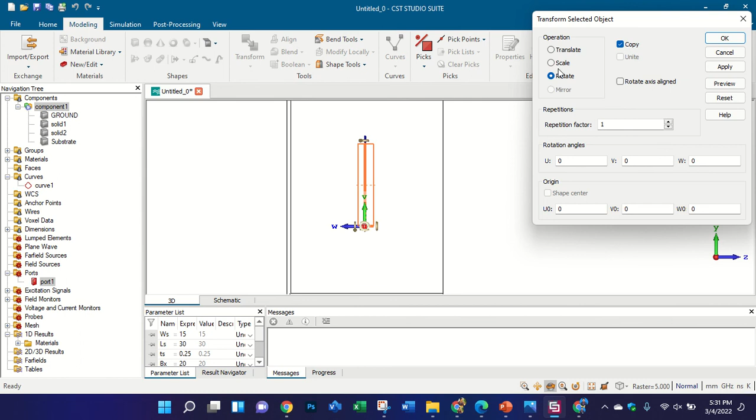Mr. Sarosh, I want to ask about how to calculate the received signal by the antenna, the data received. There is a lot of distortion from your side. You mean you are asking about the power, received power, or what? Yes, from the other antenna. Maybe if I have two antennas or three antennas, I want to calculate the received signal from one antenna to another. How much data is received, or how much S11 or S21 or S12. How to calculate it? Is there any option in CST?

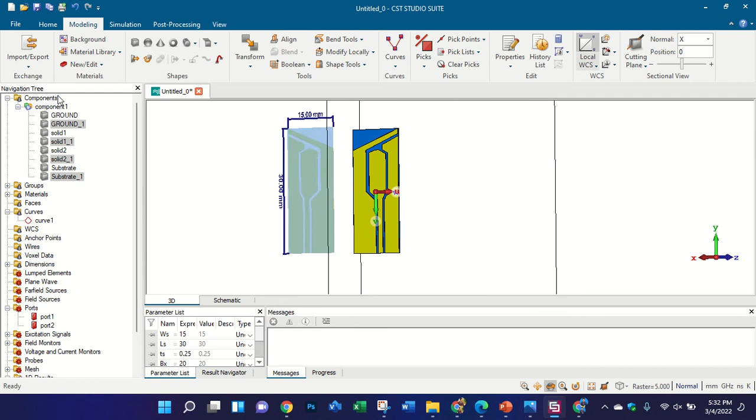Yes, I think it is available. For that you need to use two antennas in front of each other. Like I have two antennas now. You need to rotate, I mean keep the radiators in front of each other, so you need to rotate this design first. Let me rotate this design. Okay, so you need to keep your antennas like this, in front of each other.

Or maybe there is an option here in the result template, in the S-parameters, I think there is an option. I need to find it first. In this case you have two antennas, so let me check here. You can calculate the time delay, and for the far field analysis,

What is the result? They can calculate the fidelity factor and everything. Yes. And also you can see the signal. If you go to the excitation signal, you can see the received signal, but you need to run the simulation. It will not appear otherwise. Actually, this portion is basically for circularly polarized or MIMO antennas. You can calculate many things here.

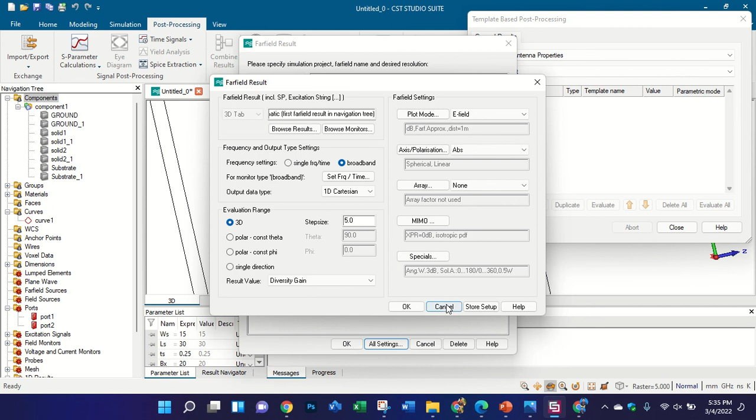We need to find it first. I think for 1D. Because a long time ago, I did not use it for a long time. 1D general, I think you can find the time delay and Fourier transform, all these things you can use. You have many things here. BSD, which I showed you yesterday, I use this one. But you need to run first, because you need to select the signal. In order to use this result template, you first need to simulate this design.

I think there is another option, brother. Sorry, but I didn't use it before. I think there is maybe a field monitor for a distance, or the far field probe or something like this. Field probe. I saw it maybe 5 years ago in a paper. They were using the field probe.

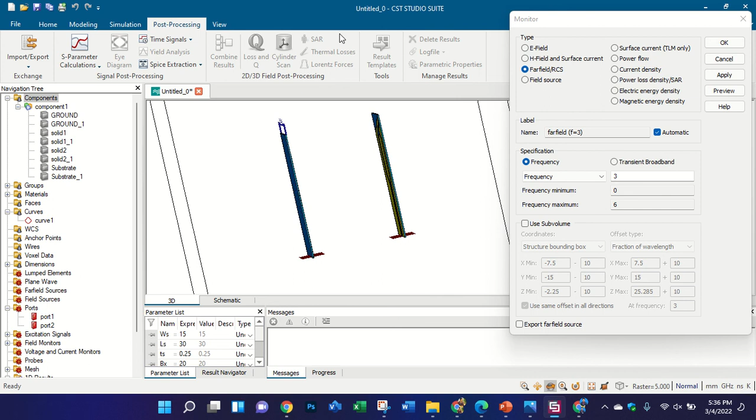Yes, actually as I told you, in order to use the post processing, if you want to use the result template, you need to first simulate your antenna, and by calling all these things, like click on this, click apply, click on the surface current density and other things, then you will find more options in the result template, and then you need to find it here. From 0D to 1D. And their equations.

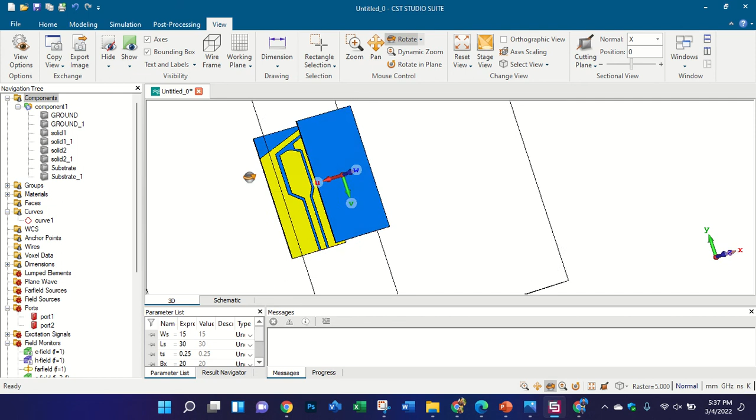What? Friis equation. Can you repeat your question? Your voice is disrupting. I mean, there are equations, Friis equations. Yes, I will find them and send you on WhatsApp. To calculate the power. Yes, there are some equations. You can use MATLAB coding for that. Friis equation, yes. You can ask me on WhatsApp. I will find and send you the equations. Okay.